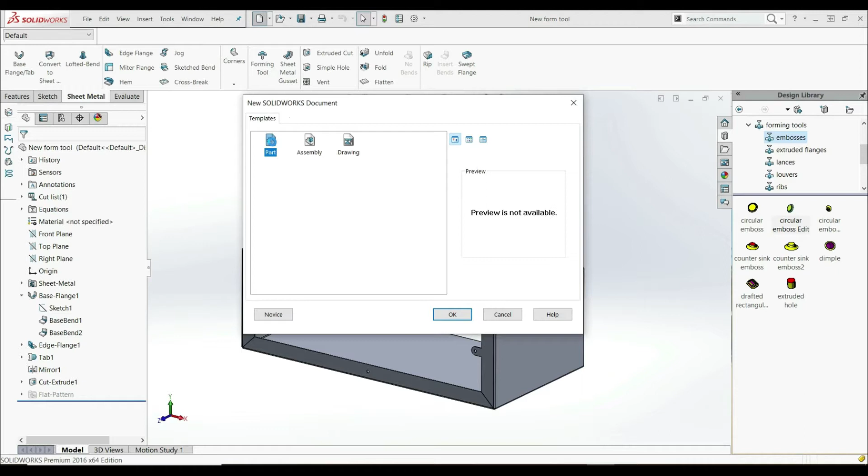Let's go on the front plane, let's create a new sketch. Let's go here with a circle, like this. Let's go to smart dimension. Let's go here with 150.

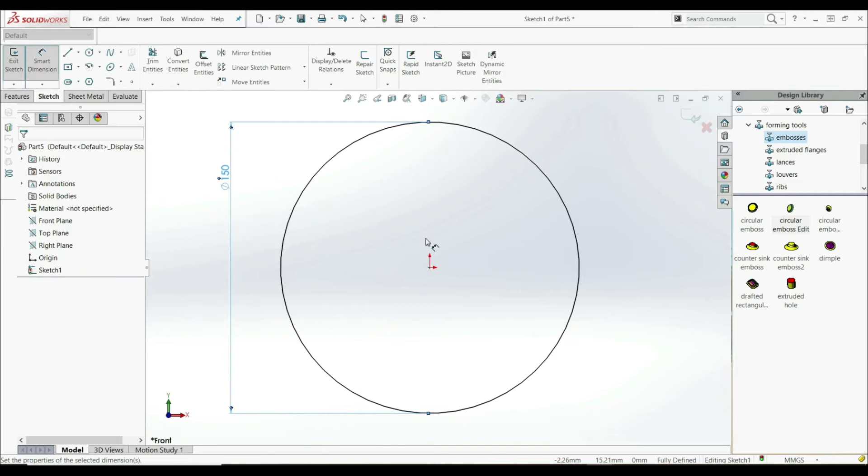Like this. Now let's go to the features, extrude boss base. Let's go with the default depth. Let's click OK.

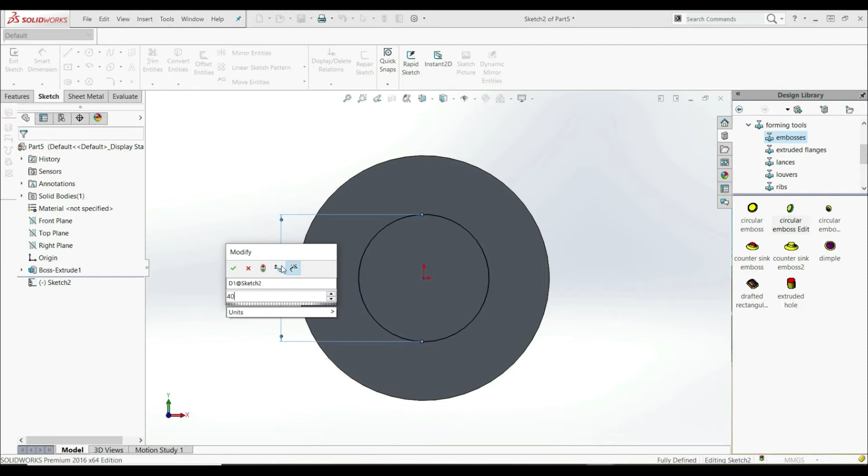Like this. Now we can select this face and create a new sketch on this face. Let's go normal to it. Let's select circle again, like this. Let's go with smart dimension. Let's go here with 40.

Now let's go to the features again, extrude boss base. Like this. Now let's go here with 30. Let's click OK.

Like this. Now let's go here to the fillet. Let's select this edge, so here we're going to apply a fillet. Let's go here with 20 millimeters. Let's click OK.

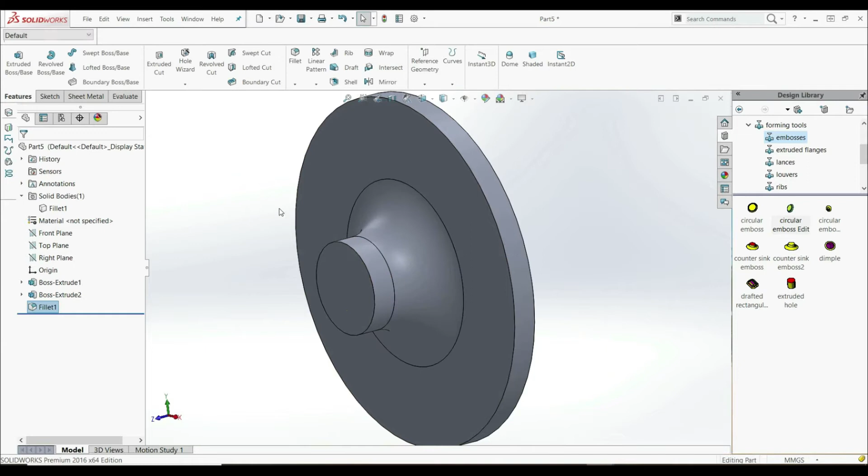Like this. Let's select fillet again. Now let's go to this edge here, but let's go here with 5, and let's click OK.

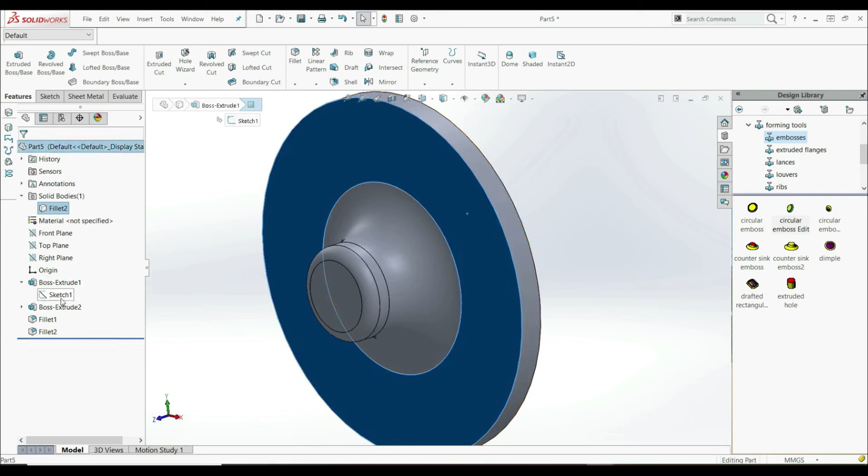Now we're going to delete this Boss-Extrude1, this one here. We only used this so we could create a fillet. So we can open here, we can select Sketch1, we can go to the features, extrude cut, like this. Let's go to the other direction. Let's go with 10 millimeters, like this. Let's click OK.

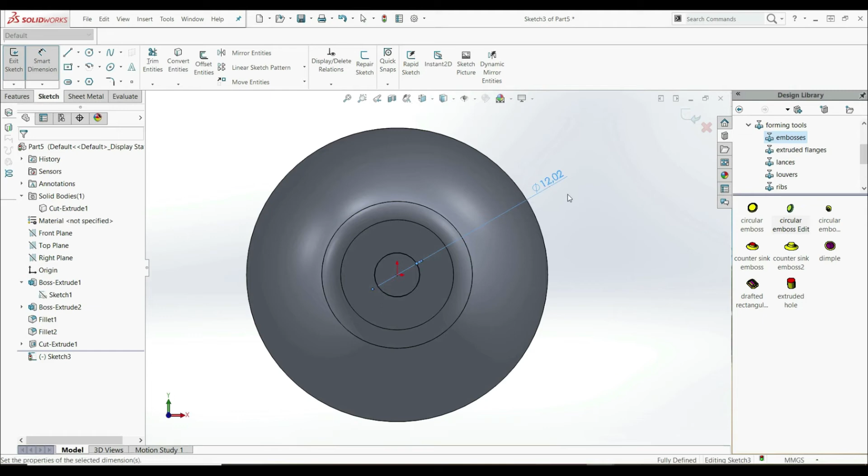Like this. Now let's create a new sketch on this face. So let's go with a sketch, let's go normal to it, and let's go here with a circle. Let's go with circle here, like this. Let's put a dimension, let's go with 10 millimeters. And let's exit the sketch.

Like this. Now with this sketch, we're going to split this face here. So let's right click here on those tabs, let's open here, analysis preparation. And here we have a split line tool, so let's select this tool. First we're going to select this sketch, and then we're going to select the face to split this face. Let's click OK.

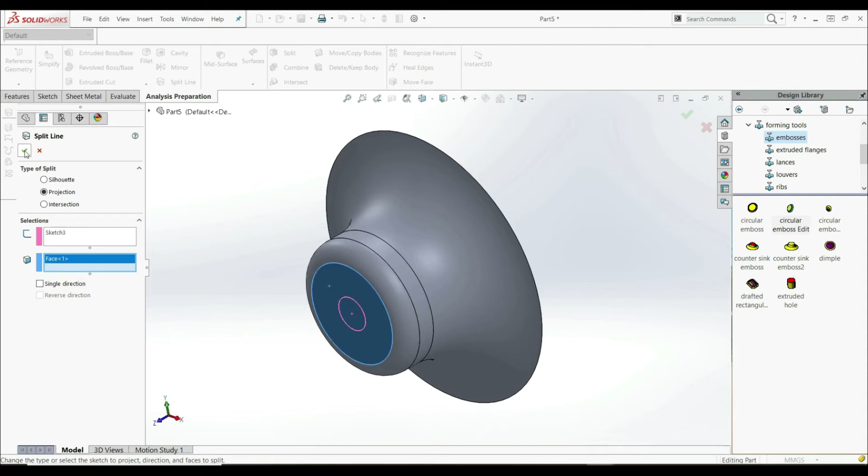Like this. And now here we have two faces, this one here and this one here. And this is our part. Now we have to convert this part to a forming tool.

So let's go here to the sheet metal, and here we have a tool, forming tool. So with this tool, we can convert a solid part to a forming tool. So let's select this tool.

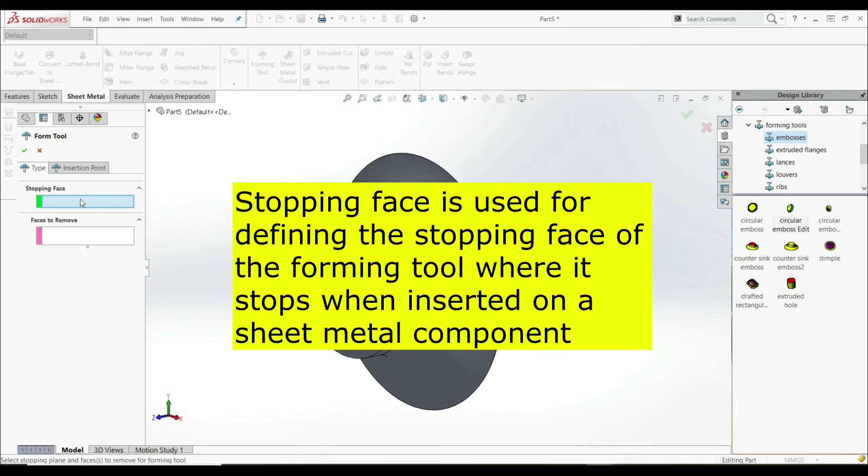And first, what we have to define here is the stopping face. So what is a stopping face? The stopping face is used for defining the stopping face of the forming tool, where it stops when inserted on a sheet metal component. And our stopping face will be this face here.

And then we have to select the face to remove. We can select a face to remove, or we don't have to select a face to remove. As we've seen in the first lecture of this chapter, here we have some forming tools with faces to remove.

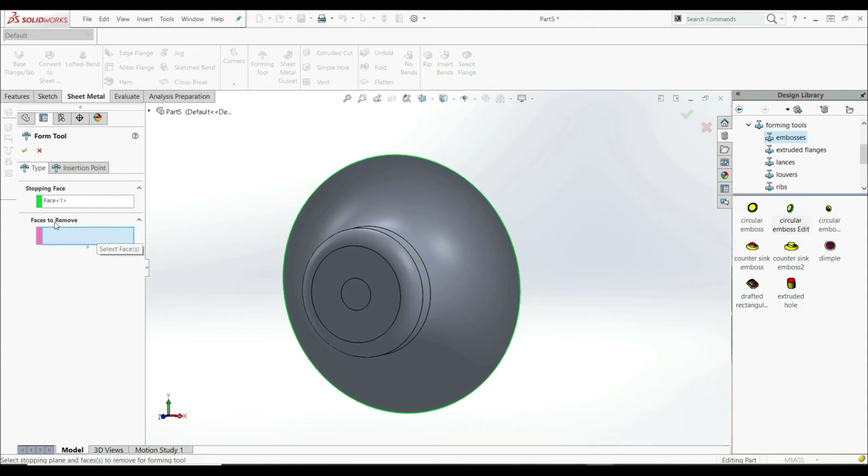You can see the red face, though some forming tools don't have a red face. We're going to add a red face by adding a face to remove. Let's select this face here. Face to remove is used for defining a face or faces of the forming tool to be removed when inserted on a sheet metal component.

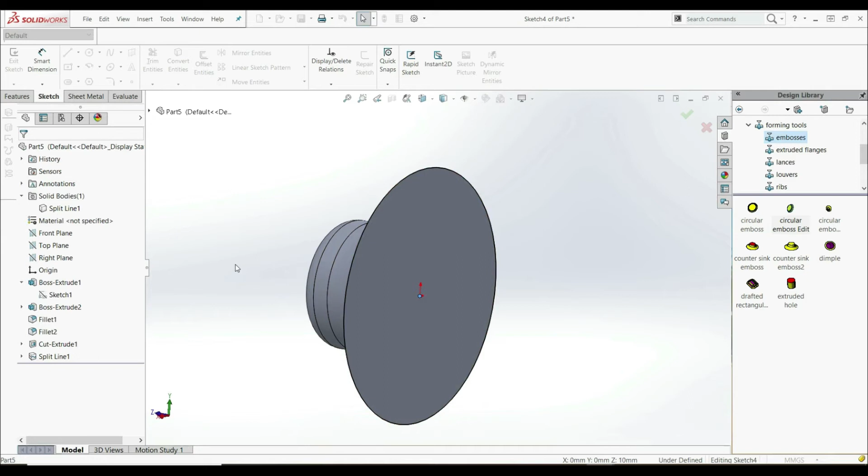Now let's go to the next step, which is insertion point. We can see that the insertion point is right here at the origin, and this is what we want. If we're satisfied with this, we can go with OK.

Now here we have three colors. We have cyan color, so the stopping face appears in cyan. Then we have red color, so the face to be removed appears in red. And yellow faces are forming faces.

Now we have created a new forming tool. Now we have to save this forming tool. Let's go to File, Save As, and let's call it new FT, new forming tool. Automatically Solidworks opens in the embosses folder.

If we want to save it here, we can save it as a part and Solidworks will recognize this part as a forming tool. If you want to save this in some other folder, you have to select form tool type, because if you save it as a part, Solidworks won't recognize it as a forming tool. But since we're saving in the embosses folder, we can save it as a part, new FT. Let's go with save.

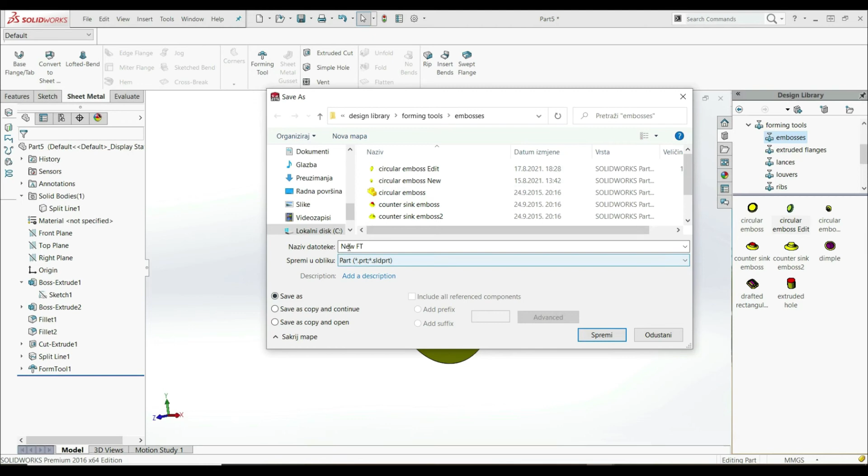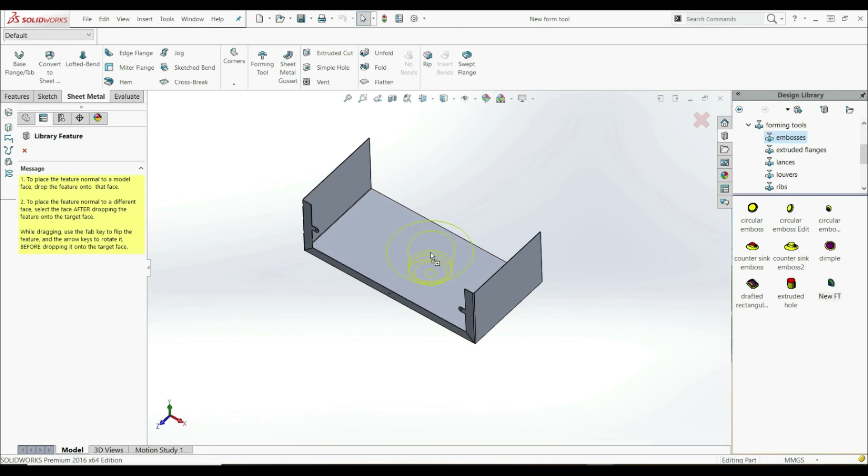Now let's go back to our sheet metal component. We can see that here we don't have our forming tool, so let's go to forming tools again and select embosses. Now here we can find new FT, our new forming tool. We can select this forming tool and put it on this face. We can use flip tool like this. Let's click OK.

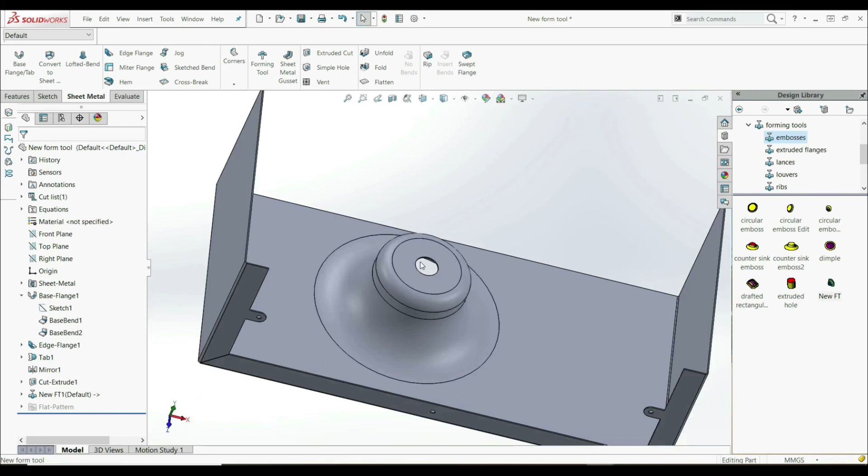And now, as you can see, here we have a stopping face, here we have forming faces, and this face has been removed. This face here was red and now is removed, as you can see. And this is our new forming tool that we have created. Now you can always have this forming tool and use it whenever you want. But you have to be careful, custom-made forming tools in real life are expensive. So this is how you can create your own forming tool.